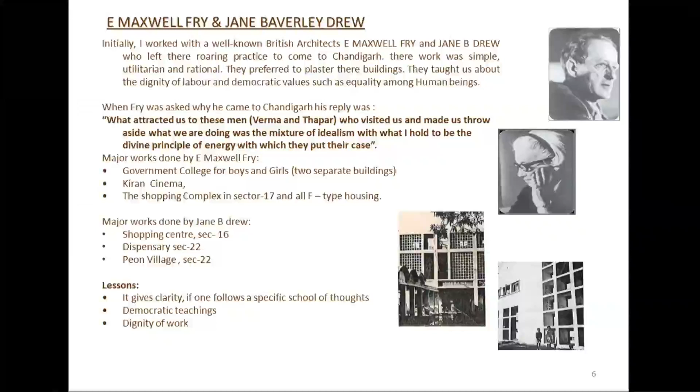These are the people who worked with Corbusier, four foreigners. Imagine people were saying, how can foreigners make on Indian soil? I'm trying to just tell you and inspire you that architecture is all about understanding - it's all about climatology, it's all about context.

You see, visit any good building of Mr. Doshi, any master, Mr. Correa, Wright, Drew, anybody in the world - the meaning of that architecture remains.

Context is the same, values remain the same. What changes is the look of it.

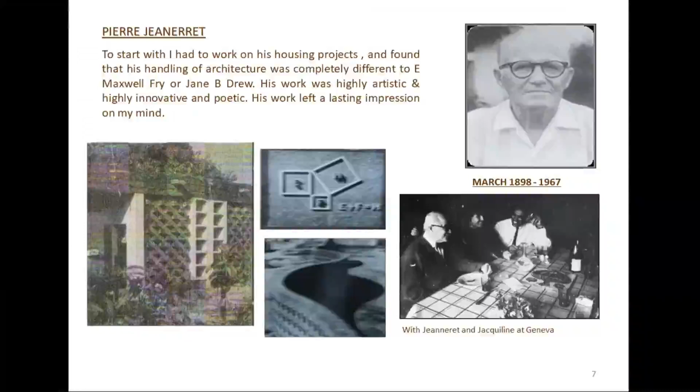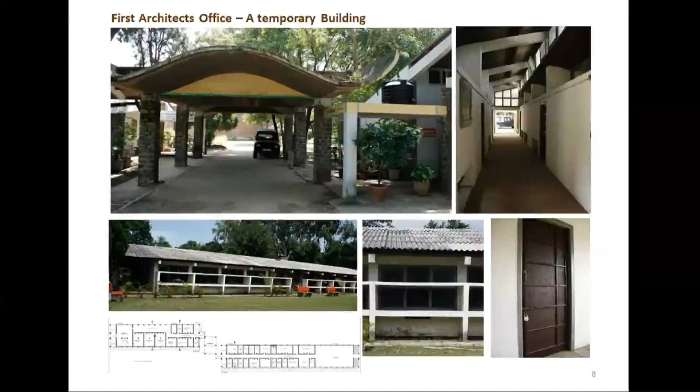This is the oldest building, the first building in Chandigarh, where Corbusier and his team worked. This is the Le Corbusier Museum now. When you come next time, you must visit it.

Some of the fine moments in the history of Chandigarh. When Pierre Jeanneret died, he said, 'I want my ashes to be immersed in Sukhna Lake.' That's on the left hand side, his cousin bringing those ashes. That was the kind of attachment they had.

Why am I talking about this? Talking about anything in architecture without understanding it does not mean anything. I can simply show you my project and say this is what I did, but it makes no sense. I need to tell you the context under which any architect is trained.

How do you bring architecture into life? Because every building is a living entity. Remember, this is a living entity, and you're making walls, you're making a roof for people to live in. It's a sculpture, fine, but it's a sculpture where people are alive. So be careful, be conscious when you create marvels like this.

See below, the 300 feet long elevation of a secretariat. I was wondering if I were to do this today, I would try to do so many things - break the monotony and all that stuff we talk about in college. But no, he didn't do it. Just one straight block. In the center there is some undulation where the chief minister will come out or speak, so he's played with the elevation there. Otherwise it's just one single building.

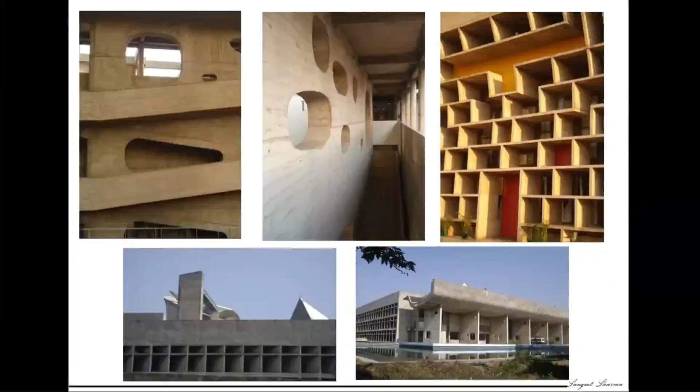Some other things which Corbusier and his team did - breakers, undulatory glazing. I hope you people have read about this in your classes. If not, look around - these things are never taught or imbibed in architecture. When you see these pictures, the way they have manipulated the elevations, the louvers, the system to break the sun - working in North India is far more difficult for an architect because you are countering three extreme climates: extreme winter, extreme summer, monsoon. Architecture must take care of all these things. It's rather difficult - much easier to work in Europe.

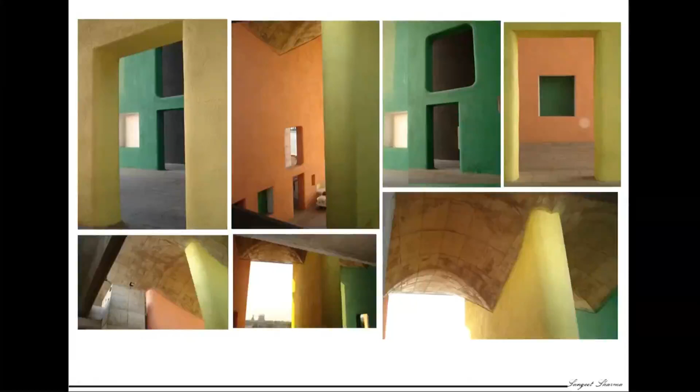We always say that architecture is frozen music. It took me ten years to realize that it is - it took me a decade to understand that it's music, it's painting. All these pictures you're seeing are composed paintings. These are the actual original colors in the assembly building.

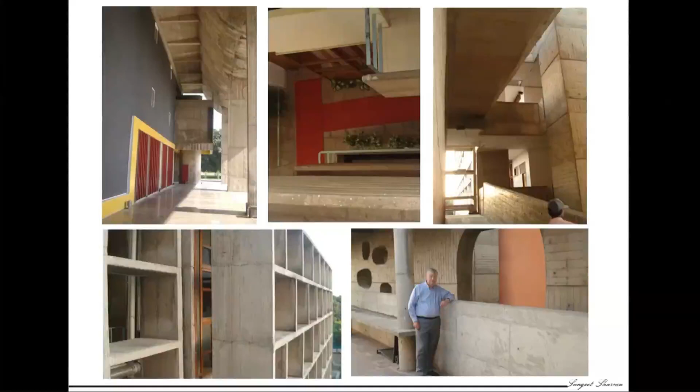That's Mr. Doshi - he used to visit Chandigarh every year and he used to learn. He says, 'I'm learning architecture, sangeet.' He's trying to show you some raw concrete finish - no paints, no Hunter Douglas claddings, no tiles. Raw concrete - that's the spirit, that's the humility where a building wants to present itself.

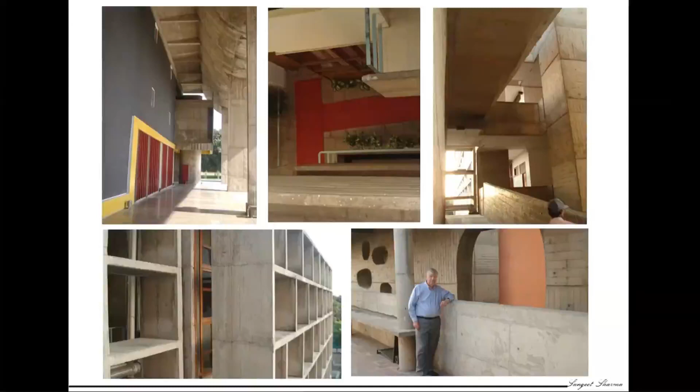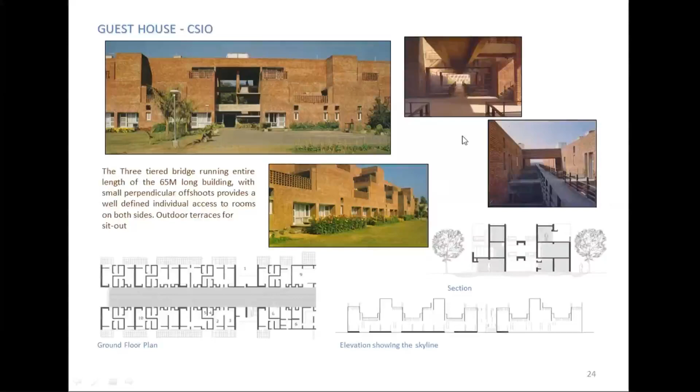Let me take you back about 60 years ago, when John Ray and my father worked on this CSIO guest house. You'll see how things are so bare. We talk of natural, local materials now, but we were using local materials then. It's strange how we begin to adopt things only when we're told in a different way. We were doing it for ages.

Important institutes in Chandigarh, like the microbial technology institute IMTech. I was training with my father when this was built, about 22, 23 years ago, and it's still as fresh.

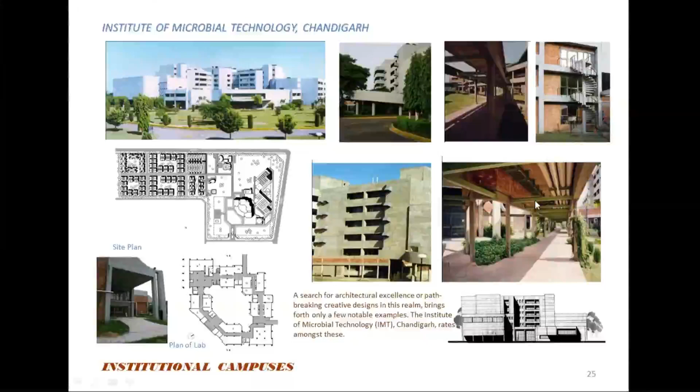Services, so much we learned. See under the corridor, on the right hand side of this picture, all the services are running under the corridor. Corridors become the takers and movers of services, and see how meticulously they are arranged. Small things matter, small details matter.

This is another institute, in JNU Delhi, NIPGR, Plant Genome Research. It's amazing to see a curvilinear form in plan used for laboratories. When we first started, I was only an associate architect, and I learned to manage services, the complexities of cross ventilation, form development, and using art in architecture. This sculpture is by Jatin Das, one of the finest sculptors and artists. So there's a process.

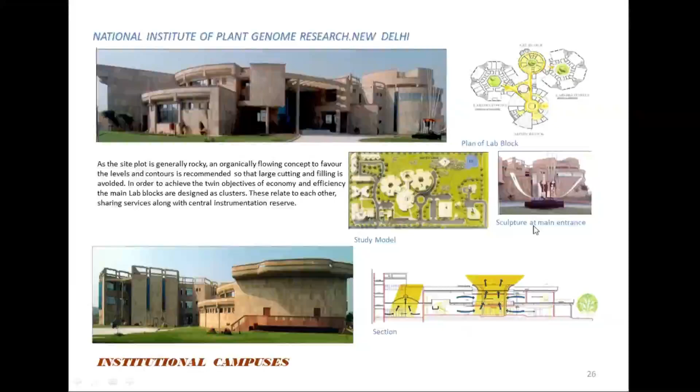Look at these images, friends. It's a government building. My client has a lot of money, I could put granite, shiny stuff, golden glass — no, it's a government building, you're answerable. But still, my imagination remains.

If it's a fire hall, I don't need too many columns. If it's an assembly hall, my structure system says I don't need them either. I want to make up spaces which are unobstructed. It's so good — I can't let my imagination as an architect run dry at any cost.

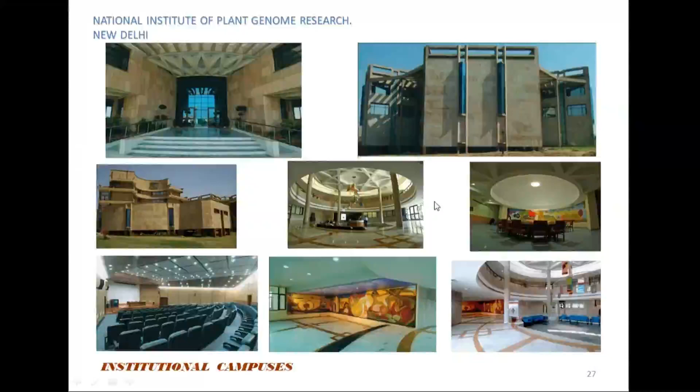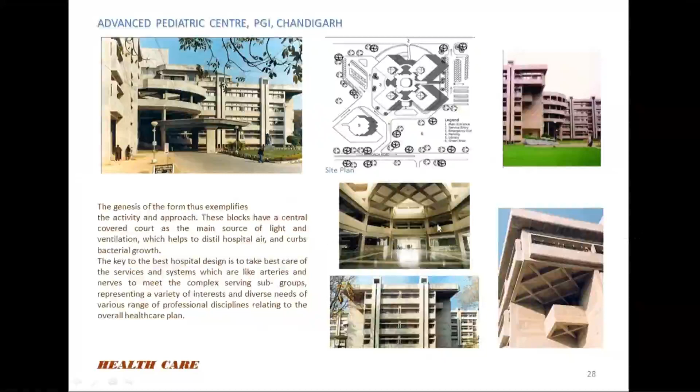Look at this building, a pediatric center in PGI Chandigarh. Look at this cantilever detail — first the cantilever, then the detail. Marvelous, the way these ducts are given, the way services are taken horizontal and vertical, they're also important. Sitting anywhere, architecture can be done — that's the beauty of your profession.

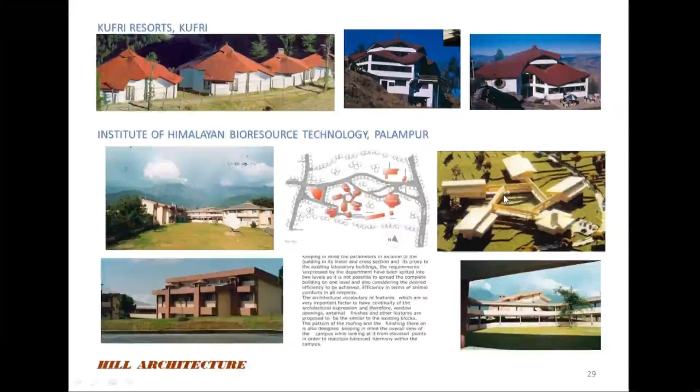We are in Chandigarh. I made these log huts in the Himalayas, Kufri resorts, and this institute in Palampur, Himachal. So I'm using the context, the climatology as a resource, as a guiding force. This is the bamboo museum, designed for bamboo, by bamboo, in Palampur — amazing technology we used in binding the bamboos.

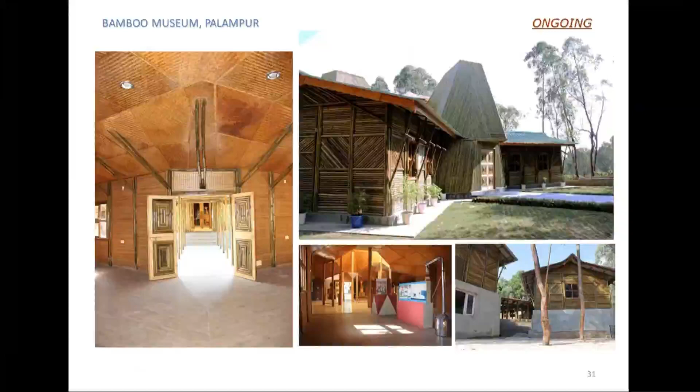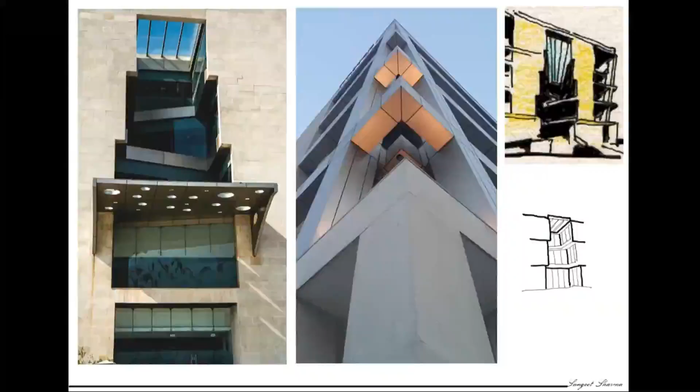This is a kind of frontal image, art forms. You can see my sketches on the right — the development is very important. All these structural systems become planters, this is what we learned, with all the beams. We don't hide things, so they become an important element of design. The whole building is supported by four Y columns at the ends, so that the space inside is columnless, because that's the purpose of the building.

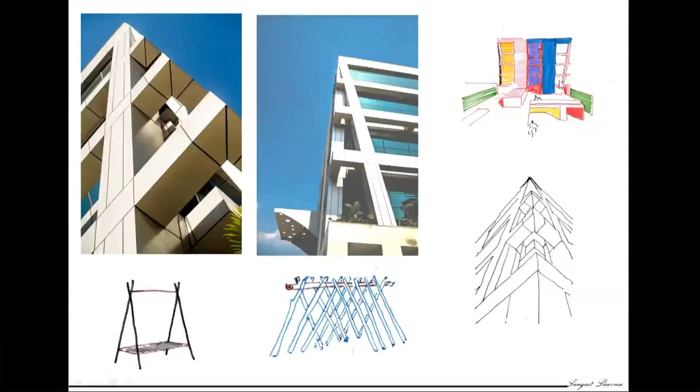And these corner details are pretty nice, a very satisfying design of mine. And this is the Mondrian, very inspired by the colors — you see my sketch on the right.

I feel you develop it through a sketch, color it. First do a painting, then come to architecture. You're supposed to like what you have considered, to fall in love with something which you are trying to produce. So your mind will tell you, use the colors. This is how it is done. Then come to the plans.

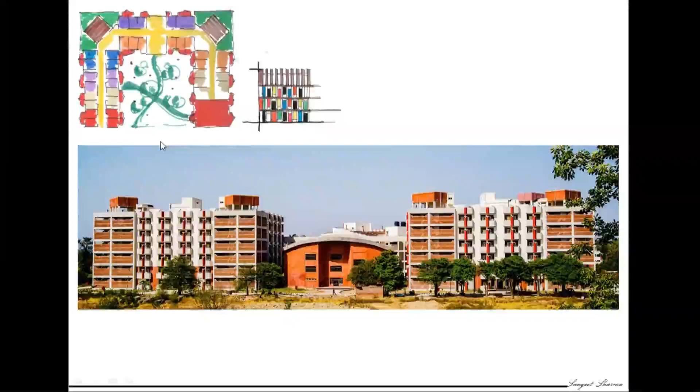These are my personal fundamental laws of architecture which I teach, and it's helped me, it might help you. So the basic forms which I've used is the mass building. That's okay, you are assembling the requirements. I'm taking you through in this masterclass how to approach your design, how to bring it out from your mind onto the paper with the dexterity of your hands - sketches, colors, painting, then architecture.

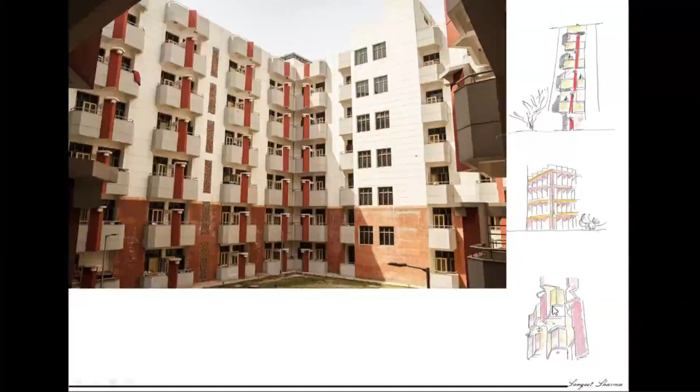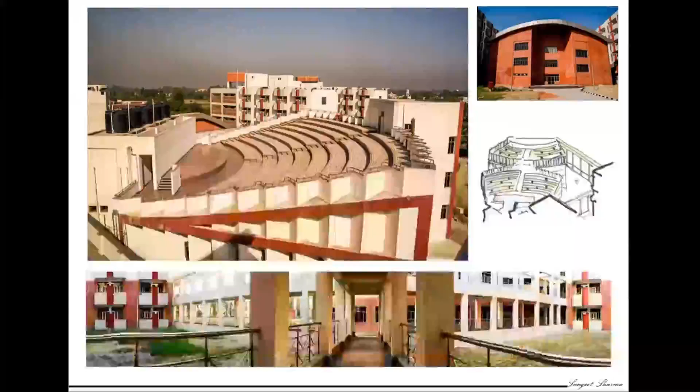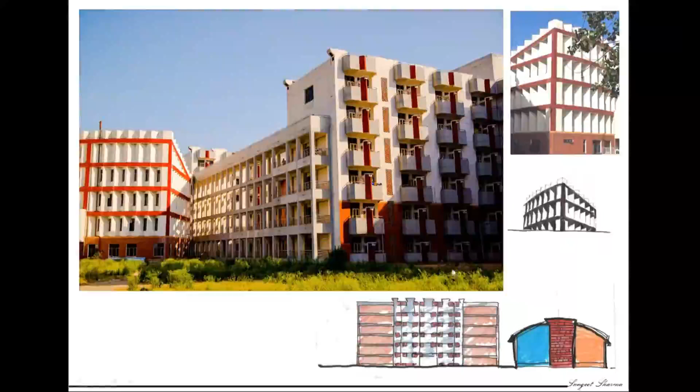You could see because I had done this painting, that's how I'm using this color and that color onto the vertical shafts. So when in 2D there's a painting, you get a painting in 3D also. That's the beauty, and the art of the whole thing. I know where to leave the bricks as natural bricks, where to use this color, an open air theater on the top, and materials begin to play as color. Spaces open up - the sketches then translate themselves into the third dimension.

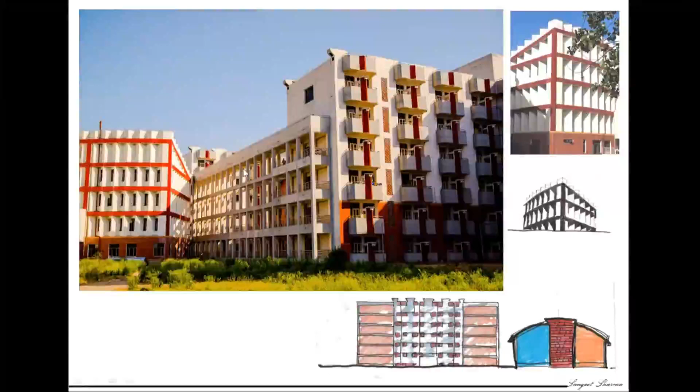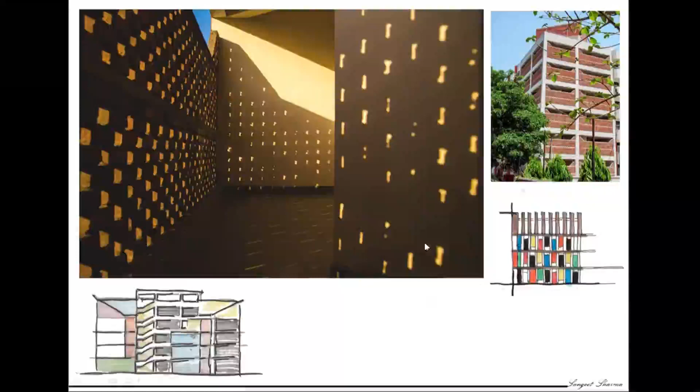Friends, I'm still using colors because I need to cut the harsh heat. This is in Jalandhar, extreme, but it doesn't spoil my creativity. I'm using a lot of stuff to give me a good calligraphy, using them by analogy. You see this painting, how to grab the opportunity. Every project which you design is an opportunity - grab it and use it.

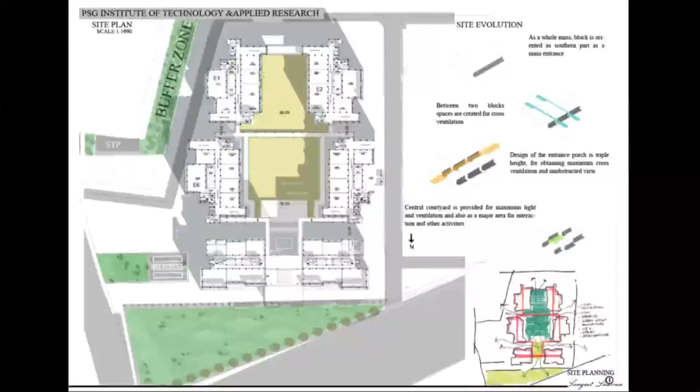I've only selected a few projects for you today. This is my very popular building in Coimbatore - an engineering college which won an exemplary award in Griha in 2018. We study climate, all of us do, all of us must do. The idea is that sometimes a lot of students who come to me, when we are judging their entries, get very much caught into the climate stuff.

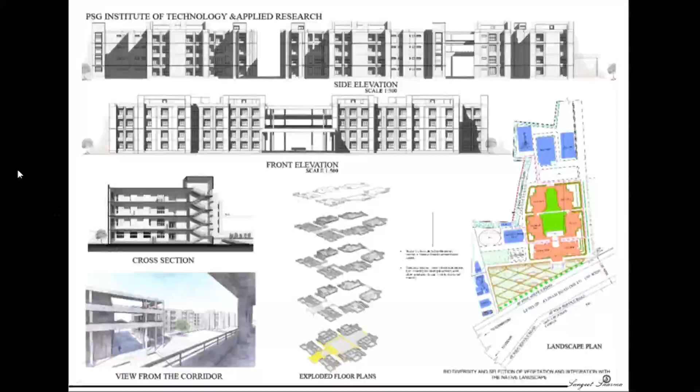If this wall doesn't need a feature or an opening, it's all very bland. Try to use your imagination. That elevation, that side may be inappropriate, but you can still create some sciographical effects. Like this, you're seeing it's a very simple building, but there is a lot of play of light and shadows on the surfaces - for example, the connecting corridors and the sketch, the different colors, and the big courtyard. Everything is elementary, it's the same. How you apply it is your individual understanding.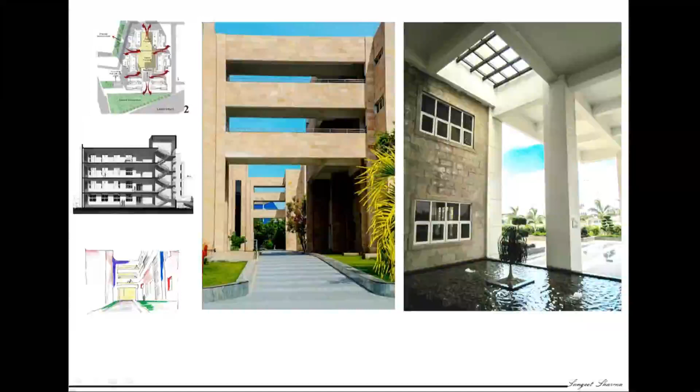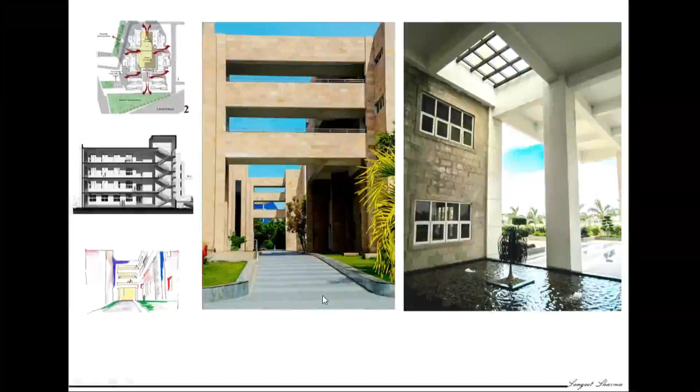Use water bodies at the entrance foyers, use these free flowing links so that there are large open spaces, because Coimbatore has a lot of free breeze. I wanted that - what we talk of sustainability, guys, you're looking at this. There's a space in between the blocks for the air to breathe, and see these spaces, double height columns. Visually it's good, technically it's good, climatologically it's good. Otherwise, if you see the elevation, it's just a frame. Blocking within blocking, that is the catch - blocking within blocking. And this is the award.

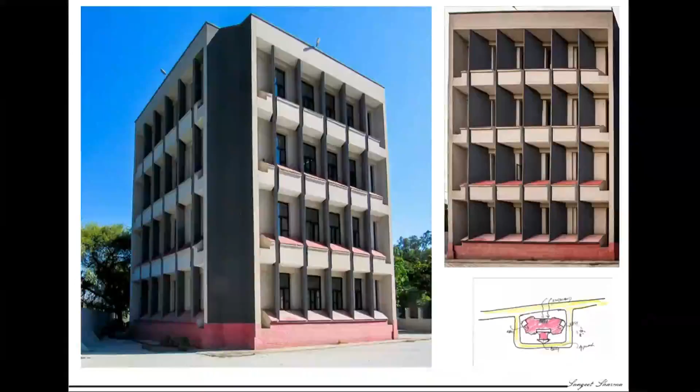Anyway, one of my buildings in Jammu University - again the directive is that it's an examination building, so there's privacy. It's not air conditioned, so I'm using my technology, my ideology, the structural systems, color combinations, using bright colors inside because it's an examination center. Students will already be very stressed, so why not create some dynamics between the light and colors, using some dark colors on the sides and then the pinpoints. Details are good.

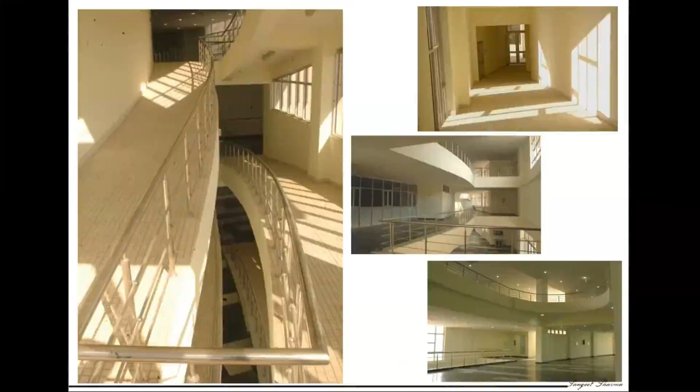You're a modernist, how could you make this? The forest doesn't demand a concrete structure. There is an appropriate solution to architecture - not what I like, it's not something made for me, it's something which is made for the context, for the place which you're building in. And that is why I take references from the hill architecture. I don't make something absurd, something that people can laugh at. But my ability to create the spaces inside, my ability to create life, sciography, science - I'm playing with the sun. And see the images, see the images.

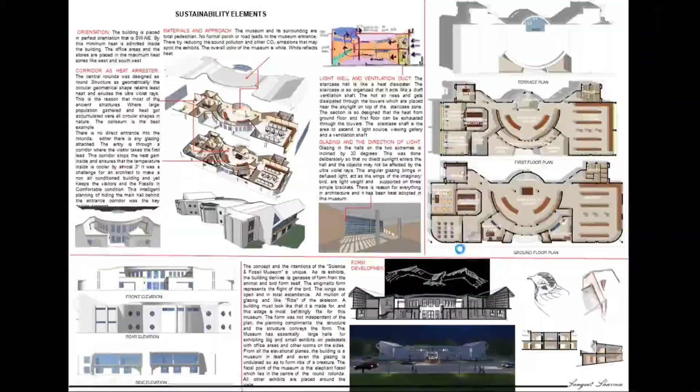Sustainability - for example, there was a 10,000 year old relic of an elephant, and it was not supposed to have direct sunlight. So I make people enter through the corridor, they go inside, come to the element, and then... but this is a museum of natural sciences, and the structure complements the design.

You are making a natural history museum. So this is the bird's eye view, which developed consciously or subconsciously - I don't know. When you keep thinking about your solution, your subconscious tells you the solution. So it's a flying bird. This is the shaft, the skylight for natural ventilation and natural light.

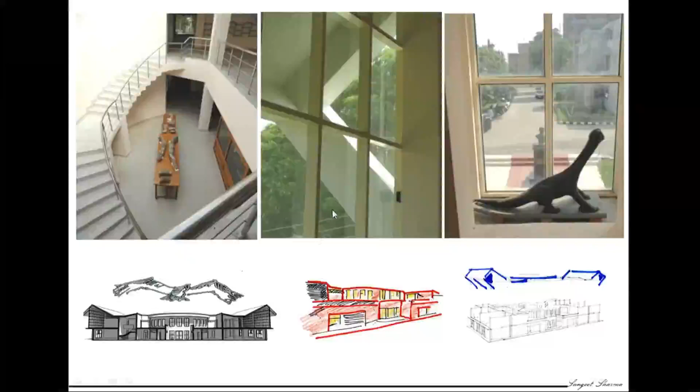Don't miss these sketches, friends. The KMG towers - just look at the sketch and the implementation. You don't need to speak much about these things. I'm only trying to tell you the process, how I want to cut the light, natural ventilation.

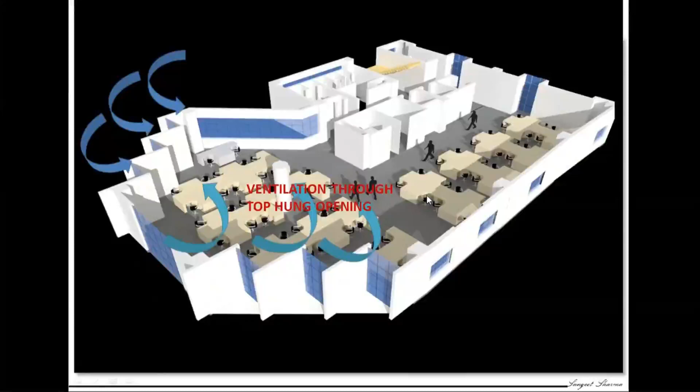Even if the client was very rich and could afford total air conditioning, it's an air conditioning building, but we had openings so that people can breathe sometimes if they don't want to be in the air conditioned environment. It creates a lot of beautiful elevation for me, and this is the kind of painting which I take up.

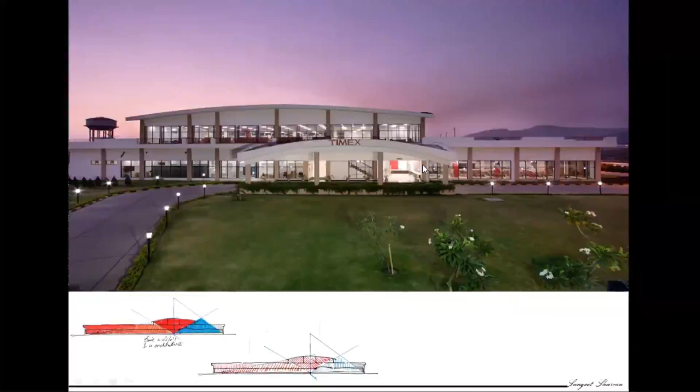One of the highly published world projects is Timex Factory. But you derive at an elevation - it will take time for you to understand this. Projections is something, and derivations is something. So you derive an elevation.

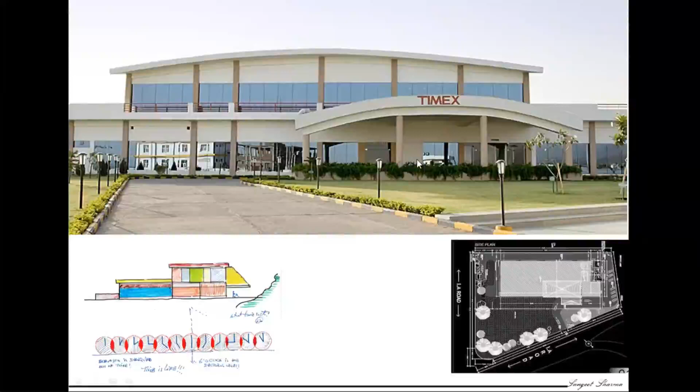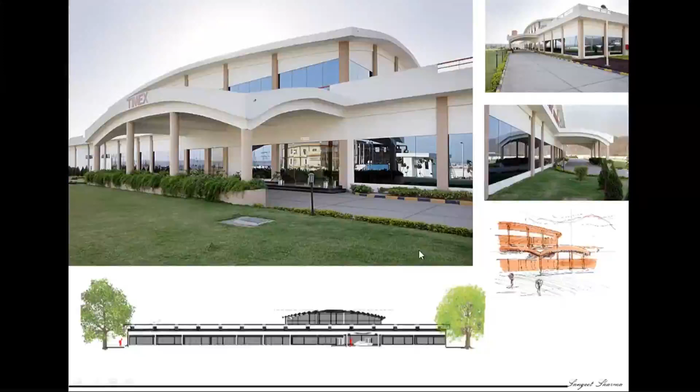But then people live here - 2,000 workers here, see this? You appreciate this elevation, friends. The proportion of this is something very unique. It catches the eye - everything beautiful, worthy catches the eye. That's the best of architecture. We're using natural stones, natural bricks.

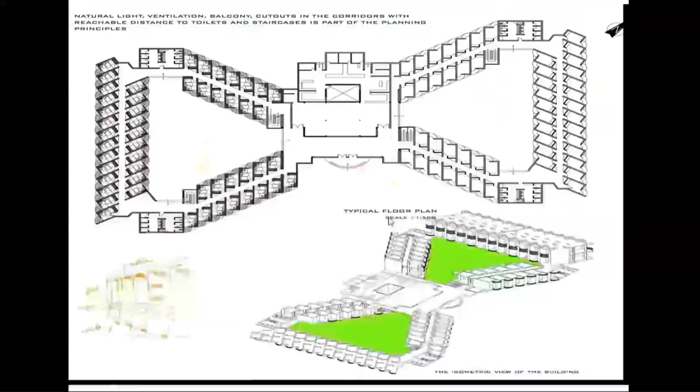The whole plan of this hostel, which I designed, is as per the sun path - straight line, and the curved balcony, and the curved scenography, straight side of a triangle. It's all geometric, it's beautiful to me, and to the people who saw this, and they say so - everything good generally will be good. So the plan is supported in such a way that it is aligned with the sun path.

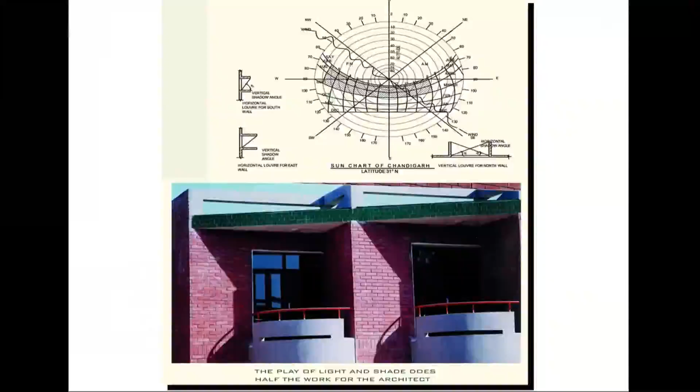Central courts which have got cross ventilation - usual, same, nothing extraordinary. It's just that you are applying sensibly. Watch it, guys - sensibly, getting your aesthetics right. That's where you balance sensibly, contextually, sustainability, etc. But if you lose the sense of your aesthetics, that's the difference between an engineer and an architect. Watch it - at the end of the day, your building must look good.

There is no other way. There is no concession at all. Whatever words you may use, whatever logic you may use, whatever high-flown fundamentals you may try to explain to anybody - at the end of the day, architecture is about a beautiful building.

Skylights, openings, details, natural stones, structure systems - they all blend. Everything blends. There are so many features in architecture, so many elements in architecture. You're only playing with them, amalgamating them, getting them right. It's like a jigsaw puzzle - get every damn thing in order, and you get some nice stuff.

Everybody tries, nobody's perfect. Le Corbusier made mistakes at the age of 80. It's perfectly fine, it's okay. None of us are geniuses, we aspire to be one. At least be truthful to yourself - this is what you want to do. You could not achieve it? Get it right. It's okay, get it right.

See this? Systems are not hidden. There's a big skylight - there are students going to be here, so give them light, give them a lot of light. You don't need to switch on artificial lights when we have skylights like this. That's the beauty of what you call - what else is sustainable? This is sustainable.